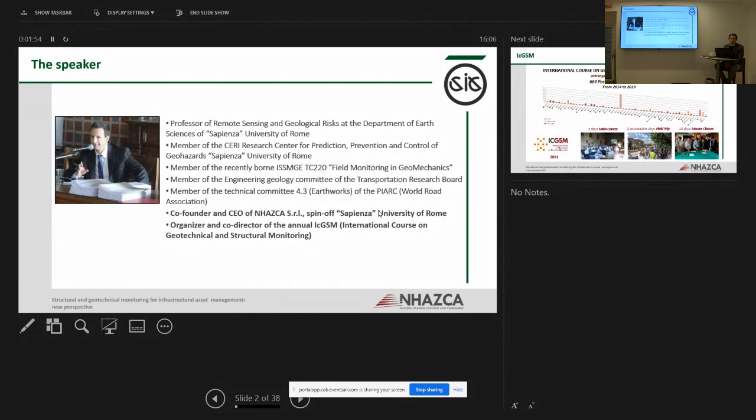I'm involved also with the PIARC, World Road Association, in earthworks, trying to push the role of monitoring for this. And I'm here also as CEO of a spin-off company of the university named NHAZCA. It's a company dealing with monitoring by new technologies, especially remote sensing technologies. And I am the co-organizer and co-director of the international course on geotechnical and structural monitoring.

Just a few words about this event, as it is becoming in the last years one of the most relevant events on this topic. In the last 6 years it attracted more than 600 people from more than 50 countries around the world, and I really hope you will have the chance to enjoy it in the future.

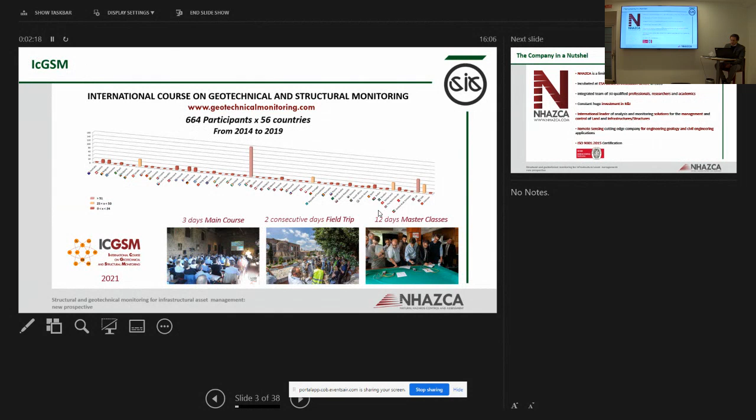A few quick words about NHAZCA. It is a spin-off company, as I already told you. It's a company dealing with remote sensing, mainly satellite and ground-based technologies for asset management purposes, and for design and consulting by using monitoring and remote sensing technologies.

Let me start with the presentation and with a few words about monitoring. When we talk about monitoring, I'm used to say that there are three main reasons to talk about. The first one is to know, what I call knowledge monitoring. The second one is to control something, that is control monitoring. And the third one is emergency.

In the frame of this event, probably the ones I consider more suitable are number one and number two. Hopefully we don't have to arrive at the emergency case, but these three types in some cases are consequential. If we don't take enough good monitoring and we don't know how things are going, and we do not control, we need to arrive at the emergency at the end.

Several remote sensing technologies listed in this slide show how they can be used for different applications, from the design phase to standard maintenance to extraordinary maintenance. In general terms, I think we can do a lot of predictive maintenance using this technology. I really hope that in the future, monitoring as a tool for knowledge will be much more used than it is right now. So you will see several cases, and we'll go through some cases to present how this technology can be useful in our field.

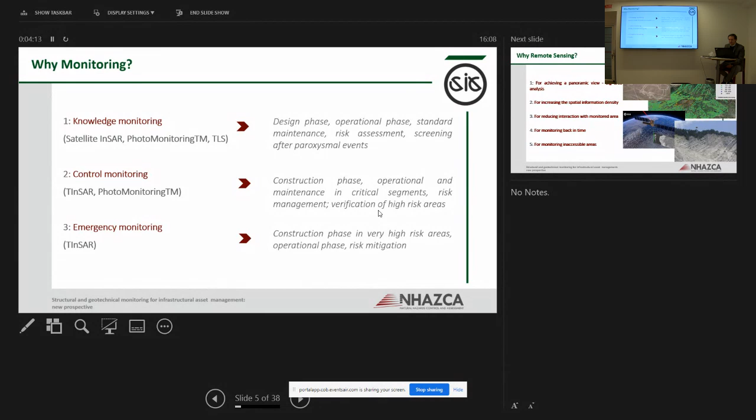But at the same time, most of them are in the design or in the construction phase. I really know that in the next years I will have more chance to present cases for the asset management case. Why remote sensing, from my point of view, is quite simple.

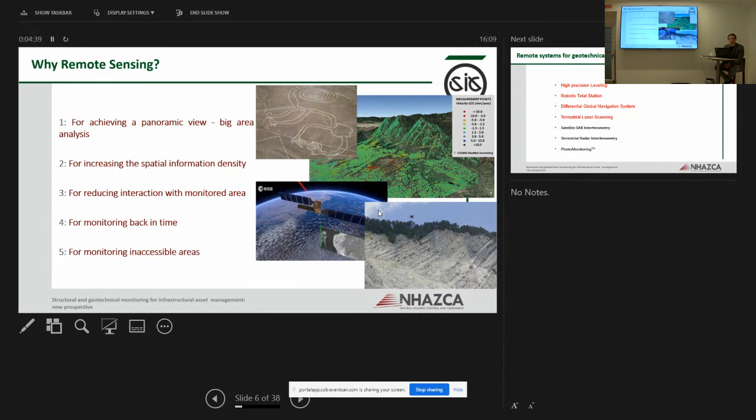You can look at things from far, have a big picture. You can have a lot of information density. You can go back in time - that's crazily useful, going back in time by satellite, this is possible. It's very, very effective for several cases. And a drone, for example, is a great tool for reaching areas not reachable by our hands or with our eyes. The main remote sensing technologies in our world are listed here.

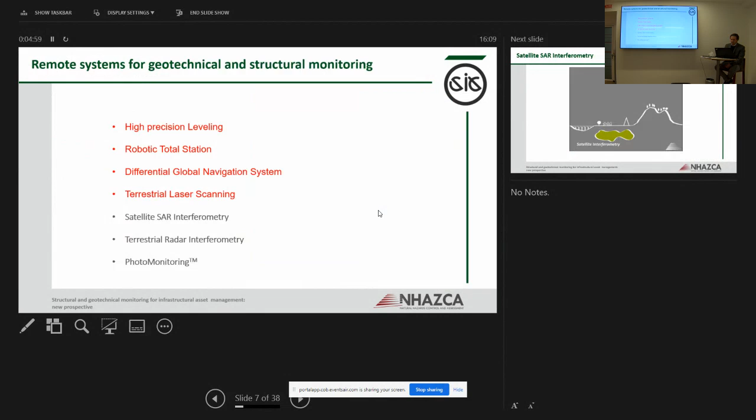I will go into detail on the last three: terrestrial, satellite radar interferometry, and photo monitoring, as they are probably less commonly known. Let's start with the first one. The first one is satellite.

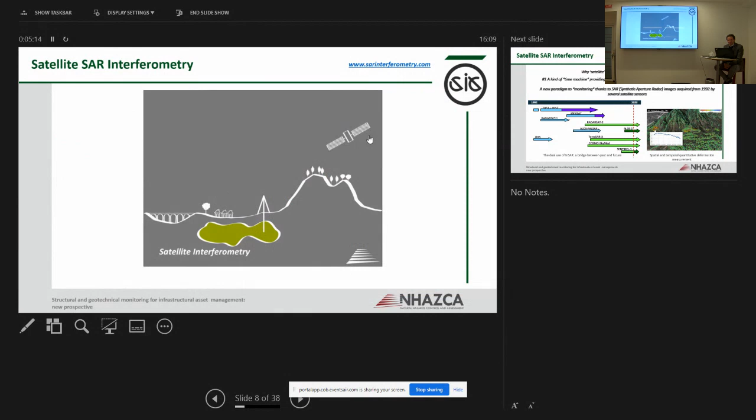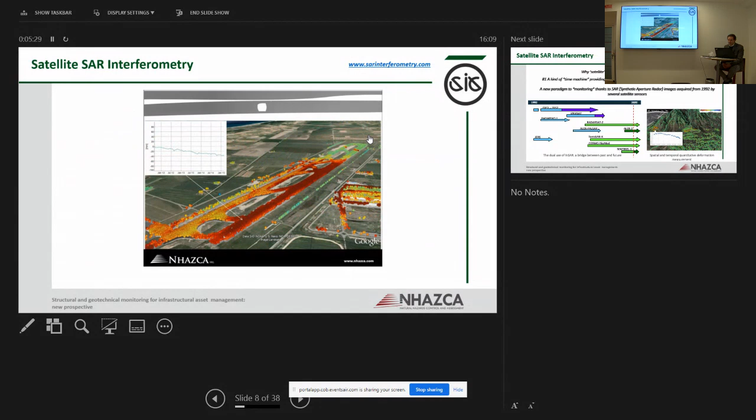This is a satellite that is moving along the Earth, collecting images every week or every day, catching information about what is present on the ground and structure. You can clearly imagine how this can be used.

Especially if you consider that there exists data from the 90s, there are today something like 30 years of database available to catch information about the past. But there are also a lot of satellites available for future monitoring. I think today there are more than 10 satellite SAR missions that can be used for detecting millimeter displacement on the ground with a weekly update. That's really something very useful.

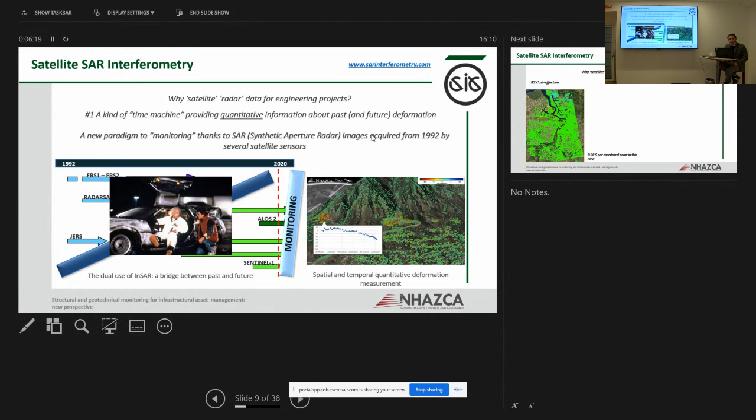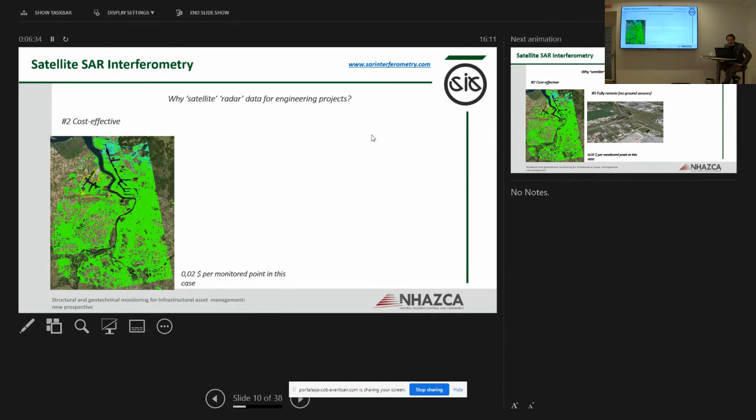But what I think is much more interesting is what is shown in this picture. You can go back in time and have today a vision of what happened in the past, and that's very important, especially in the design and maintenance phase. Other good reasons for this technology are cost effectiveness, especially when you look at large areas, the cost becomes something like nothing.

Less than €1 per point or a few euros per square kilometer. It's fully remote, so you don't need any installation on the ground. A lot of space agencies and private companies are managing these satellite missions, so they will be much more present in the future. It's something that will increase.

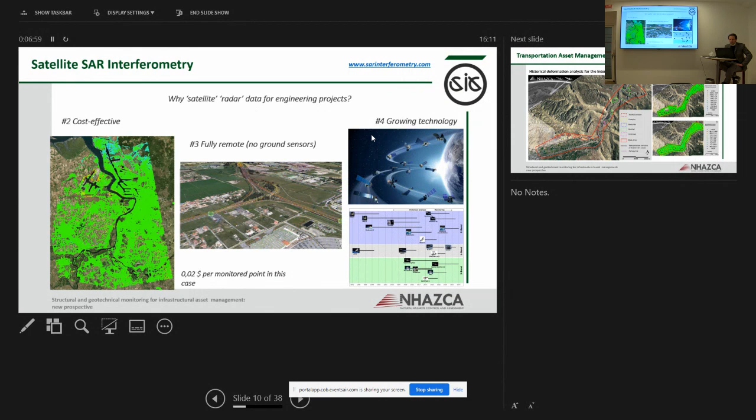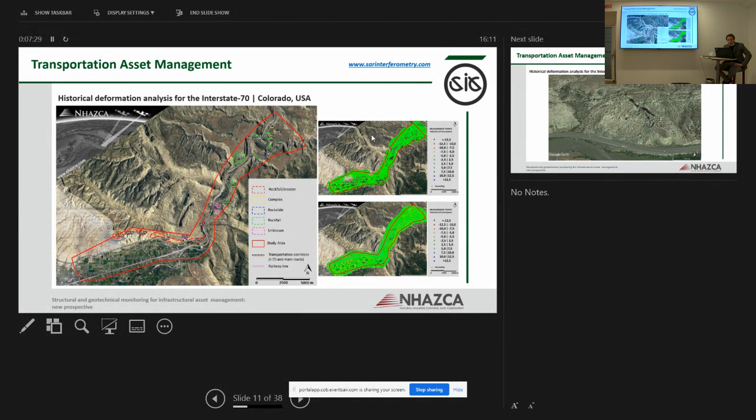How can this be used? I want to start with this case, which is nothing related with tunnels, but related with a transportation asset where in Colorado, USA, the Department of Transportation decided to use satellite InSAR technology to identify potential hotspots of deformation in the area that could help them manage their inspection and their budget for repairing and maintenance.

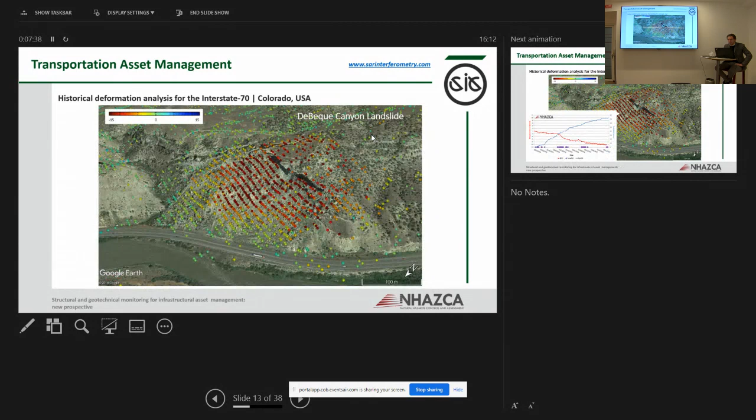That's an example of a huge landslide that they identified, defining exactly the site. You see some cracks exactly correspond with the deformation pattern, so that's quite interesting. At the same time, you have time series, so you can identify if there are correlations with causes like snowfall and rainfall.

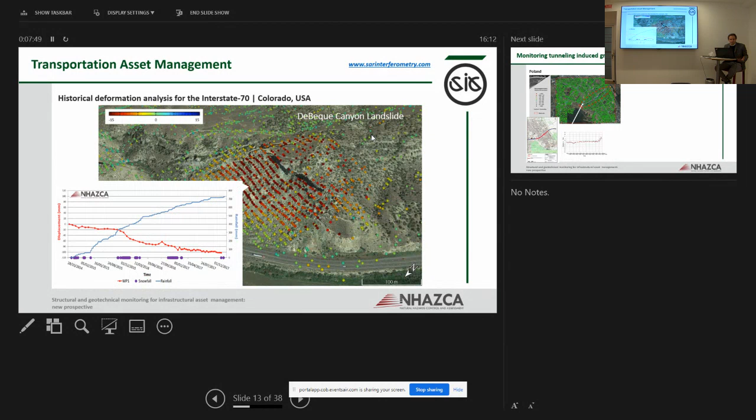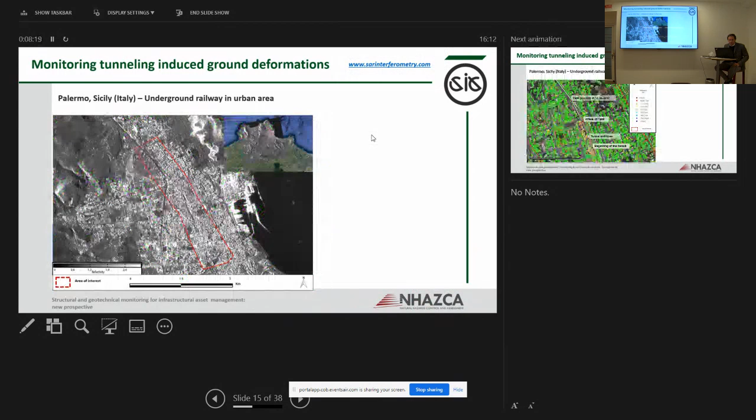That's another one where, unfortunately, something happened. You can see how, starting from this strange map, which is a radar map, you can reach this kind of information, where the colored points identify displacements. Green, as usual, means no displacement, while yellow and orange mean displacement. In this case, we are in a city in Sicily.

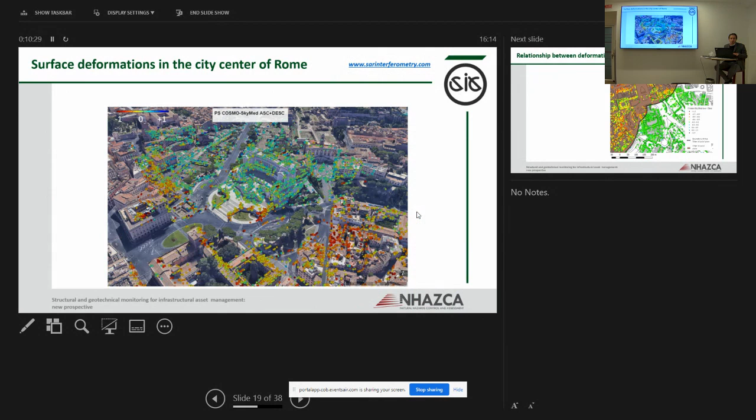Again, green means no movement, and red and yellow mean movement. These results show that there is an overall area much more affected by movement than the other. When we compare these different patterns of these two areas with some geological features and information, we recognize an incredible correspondence between the area affected by deformation and the one affected by almost no deformation. Of course, the one affected by deformation was on soils much more compressible than the others.

So that's a great example of how this technology can be used to assess in areas like this one the original condition, and to support geological investigation. That's a new frontier that can be achieved.

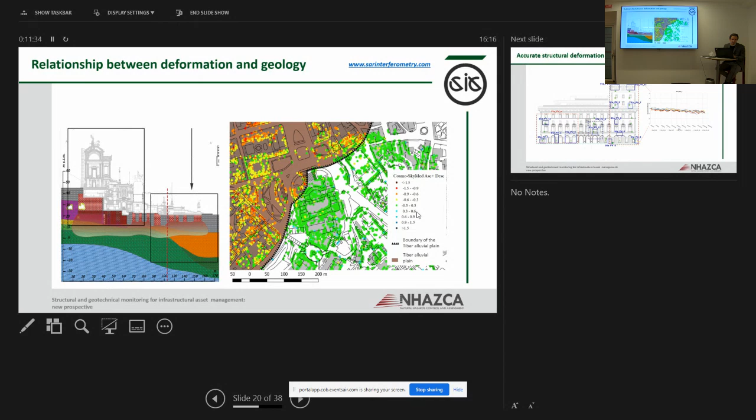So to integrate this data with standard information to increase the knowledge of the underground condition. And so that's again what I was mentioning as a knowledge monitoring solution. Then of course the details can be done like here, and as soon as you have high resolution data, like in this case, in addition to this wide scale analysis, you can also go into a single building, like in this case, and recognize some specific points in these buildings and recognize what is the behavior of the building.

In this case, for example, we see there is a long-term trend, quite small, but at the same time, there is some seasonal, cyclic deformation that is very useful for people that are planning to excavate a tunnel, because they know that there is a sort of conventional and standard behavior of that building.

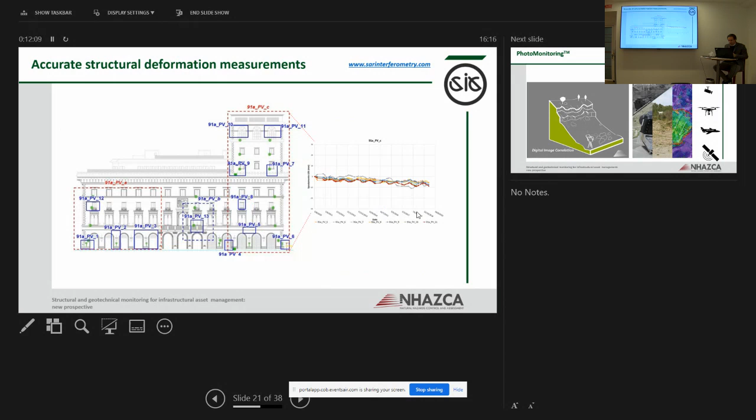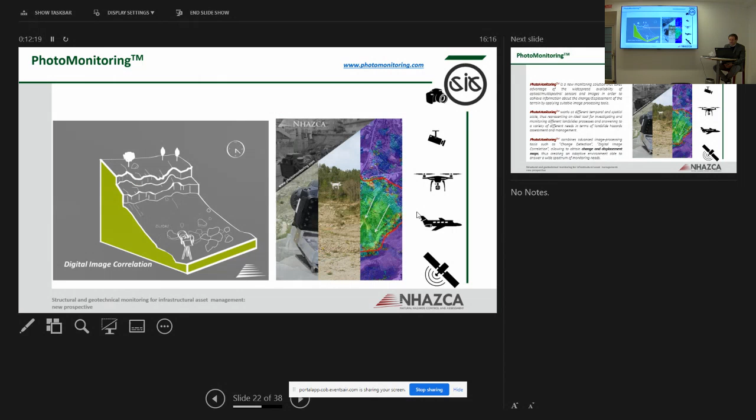Another technology that, from my perspective, has a great chance in the future to detect cracks as well, but also to check deformation. And the reason is because it has several potentials: it can use any kind of images. I mean, images from smartphones, photo cameras, cameras installed on the ground, also installed in a tunnel, or installed in a drone, or installed in a satellite.

And using several processing technologies and several algorithms that are coming also from different fields, like speckle tracking, digital image correlation. I don't want to enter into much detail, but just to let you know that combining all these technologies, it is really possible to use images to detect quantitative information about change and about displacements.

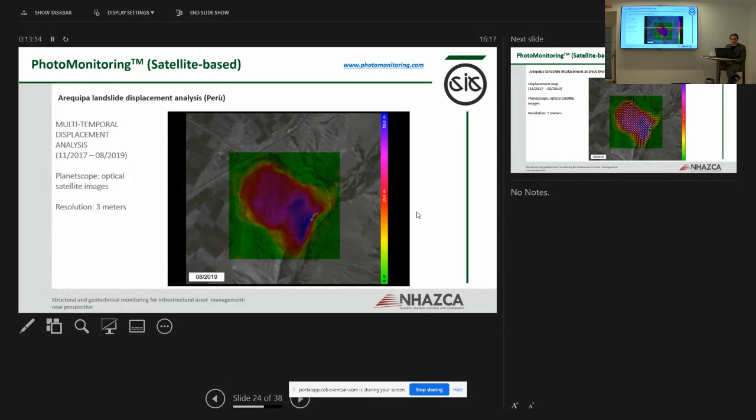This is just an example of what can be done using some rough resolution satellite images collected on this site. We are in Peru, and you can identify the movie of 1.5 years of deformation of these landslides. Of course, you can have a final example where, in addition to the color that is showing the amount of movement, you can also have some arrows that are showing the direction of movement.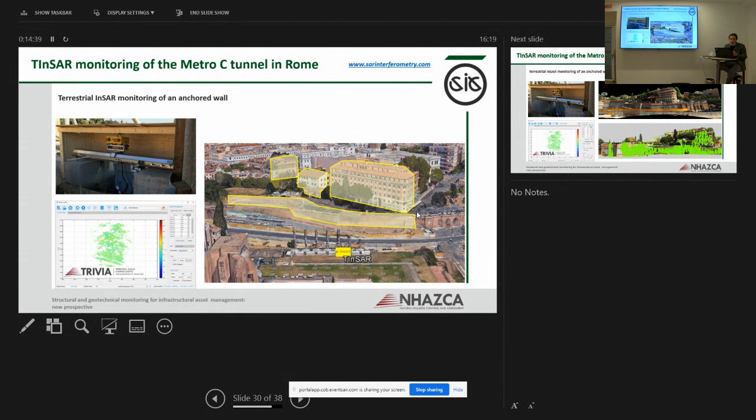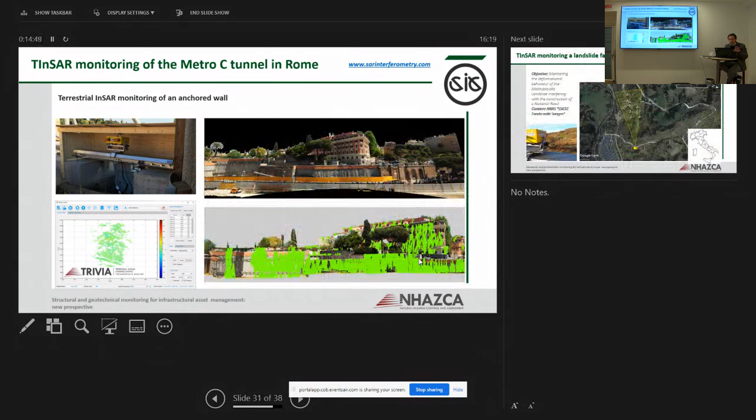In this case, it is an excavation of a station, so it's a very huge excavation site. I think all of you are able to understand where we are. If not, we are in Rome, in the city center, in the Fori Imperiali area, nearby the Colosseum. In this case, we use the ground-based radar using software developed in-house for the processing, and we are able to catch an image showing, fortunately, that everything was green. So no movement in different points of buildings and on the wall behind.

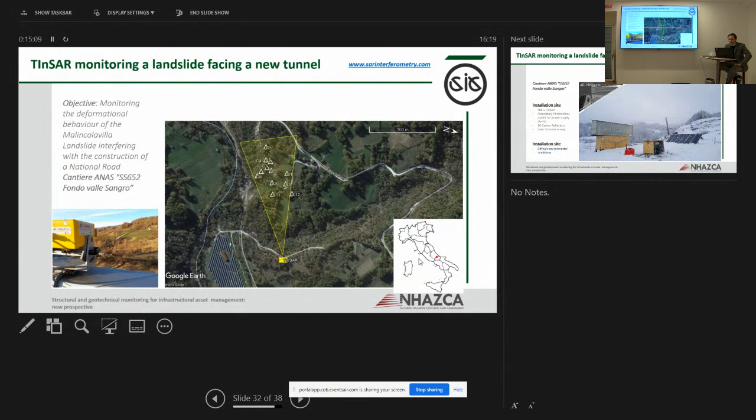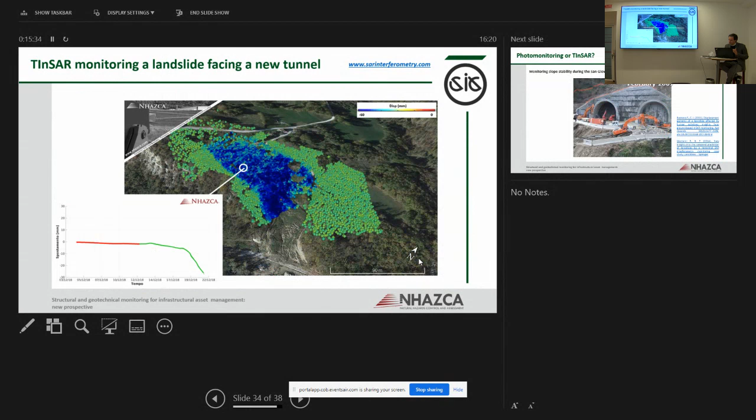And that was really useful, again, because for each one of these colored points, you have a time series with data every 5 minutes, 24/7, with any weather condition, including fog, including snow, and so on. And this technology was used for the first time in 2007.

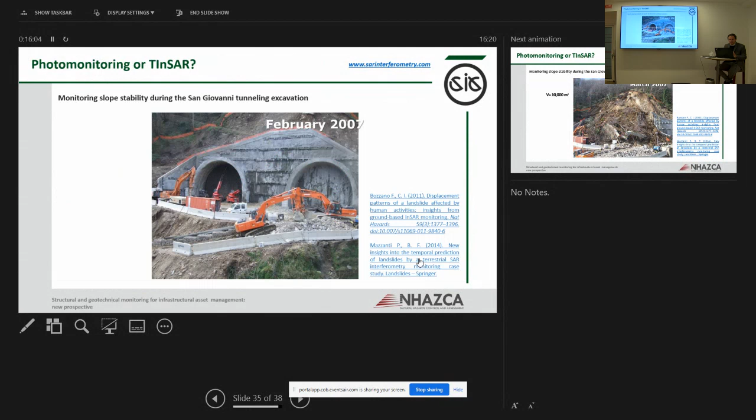I'm getting to the end, but just to say that this is a technology that has quite some potential, quite unusual still today, but the first application dates back more than 10 years. So it's very consolidated, with a lot of scientific and technical background. And let's see, this first case was a tunnel, the entrance of a tunnel.

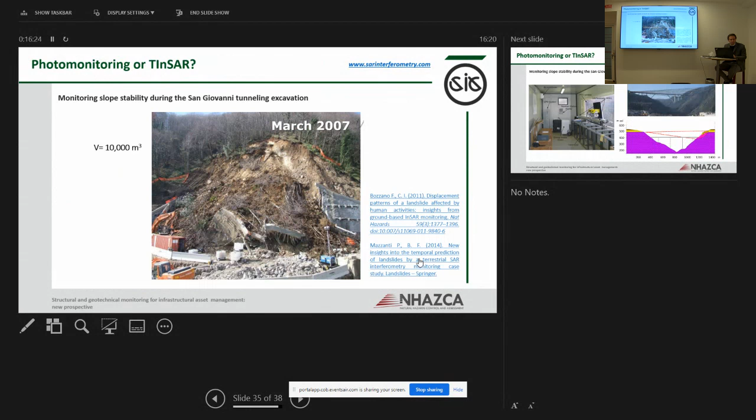We are in the Calabria region. That's what happened during the first excavation, a few meters of excavation. What we realized is that in that slope, in addition to this relatively small collapse, there was a huge landslide, 50 meters deep. There was a need for real-time control during the excavation and the repair works.

So we installed for the first time in the world this instrument at this site, and we were able to control any movement and to detect, time by time, any kind of deformation caused by excavation works on the tunnel, action on the surface. And what is good is that at that time, we installed a camera. We installed a simple camera just to check what was going on on the slope in terms of works, so as to better interpret the data.

Today, with the capabilities of image data processing, we took these images from 15 years ago, we processed them, and we were able to catch the deformation of the slope just using the pictures taken by the camera.

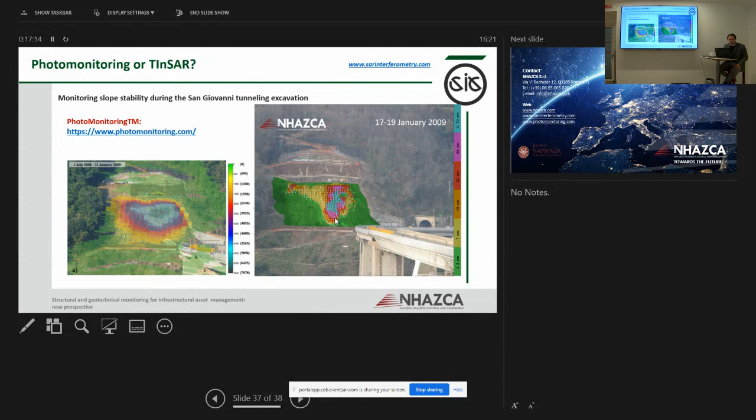So that's everything for now. Thank you very much for your attention.

So, Professor, one of the questions is, what is the precision of the system? I presented 3 different systems in general terms, so I will try to answer for all of them. For satellite technology, satellite InSAR technology, the precision can be on the order of a millimeter. So it's a millimetric precision level.

For the ground-based radar, 0.1 millimeter can also be achieved, but of course it depends on the range distance, on the weather conditions, and so on. But in general terms, 0.1 millimeter is something reachable.

And for the photomonitoring, it strongly depends on the sensor. You can use different kinds of sensors, so very close sensors can be very, very accurate, a millimeter or less. If you look at something from the sky with coarse resolution satellite images, of course, it can be on the order of several centimeters or decimeters. Anyway, it strongly depends on what you use in terms of sensors and data.